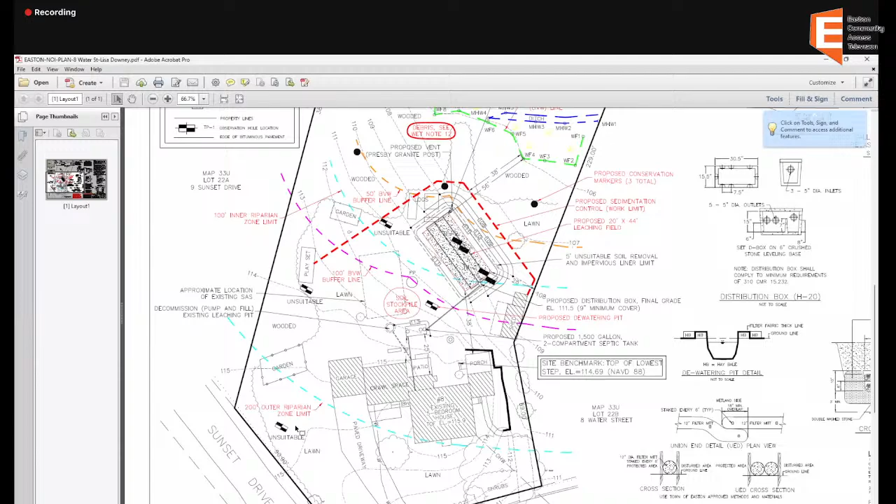Basically, with this one, we're trying to balance the system between the house and the wetlands, so we do end up inside of the buffer zones. We found unsuitable soils in the middle of the yard, which potentially could have put us outside jurisdiction. We started on the side yard, did not have favorable soil conditions, and we did as we got into the back, so that's why we ended up back here.

Basically, we're proposing the removal and decommissioning of the existing leaching pit in the backyard and leaching area, indicated by the rectangles. We're proposing a new gravity system with a 1,500 gallon septic tank to a 20 by 44 foot leaching field. We've provided sedimentation control around the project, shown as the red line, a 12-inch diameter filter mitt. We have our details for that on the plan.

Additionally, we show a dewatering location outside of the 100-foot buffer to the wetland, and a soil stockpile area adjacent to that. Site access for this project will be coming in off of the Sunset Drive side of the driveway, wrapping around the left of the house and going out back. So the sedimentation control line should protect the existing resources as it's shown.

What else? We have some notes of debris to be removed in the backyard. We're also proposing 3 conservation markers to be installed at the time of construction. Those are along the existing tree line on the right and the middle, and the second one's placed into the wood line at the 50-foot buffer.

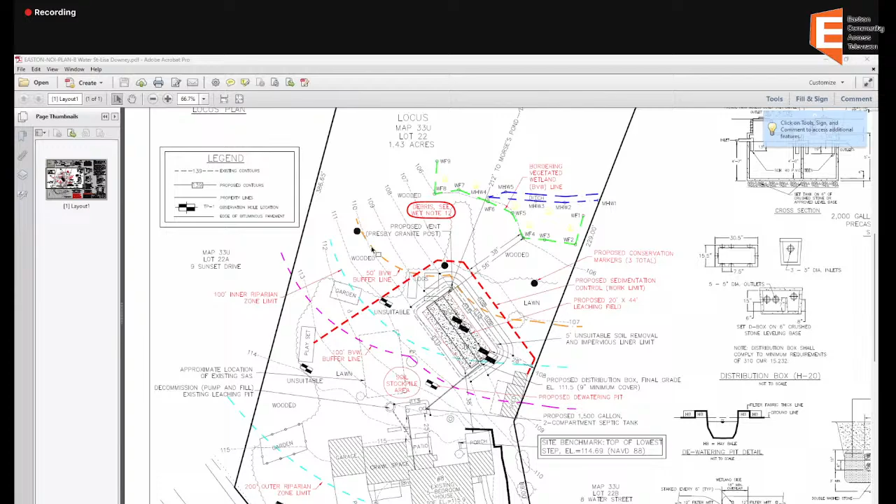Sounds good, thank you. Comments from members of the commission? None for me. Comments from members of the public? Seeing none, Peter, I assume you guys want to close this?

Yes, please. All right, motion to issue an order of conditions and permit for work for 8 Water Street. Second. Just close the hearing first. Should close the hearing first. You're absolutely right. Motion to close the public hearing for 8 Water Street.

Second. Roll call vote. Benson, aye. Carol, aye. Crossman, aye. Speedy, aye. And now we'll go back to my last motion. Motion to issue an order of conditions and permit for work for 8 Water Street. Crossman, second. Roll call vote. Benson, aye. Carol, aye. Crossman, aye. Speedy, aye.

Very good, thank you. All right, and if I could quickly ask, do I get to stick around for the COCs later? I believe at least one of those was continued. I lost the agenda, sorry, I'm flipping through it right now. I think Foundry Street was on there and 520 Foundry maybe. Yeah, and 105 Washington. Is that it? Yeah, I think so.

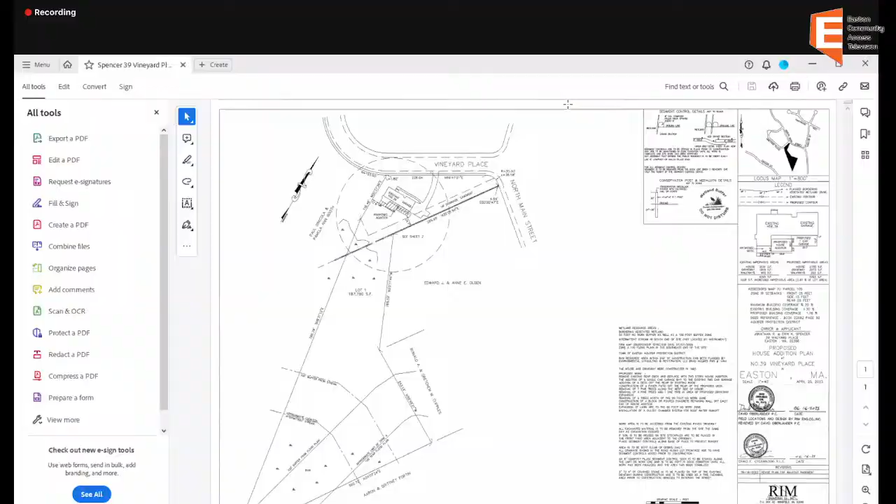Brad Holmes of Environmental Consulting and Restoration flagged the BVW that's adjacent to the rear property line. Let me try to pull up the second plan, I'll have to open that one. I have it too, Craig, if you need me to share, I certainly can. Okay, I think it's here now. You see that now? Yes, that's it. Okay, so, excuse me.

So the purpose of the project is twofold. One is to add on to the existing house. You have the 2-car garage with the driveway coming in off Vineyard Place. You have the existing house with a small bump out in the back, and a deck sitting right there where we're showing a proposed addition, with the walkout basement underneath that deck. So the intention is to add a third bay to the garage in this corner, take off the deck and make this area a living space in the house, 2 stories tall.

And then over here on the second floor - first floor from the front yard, but from the backyard raised up - is an existing window that would be converted into a door leading off to a deck. And then off the deck, we're coming down onto a proposed patio, a paver patio in this area. So if I can zoom in.

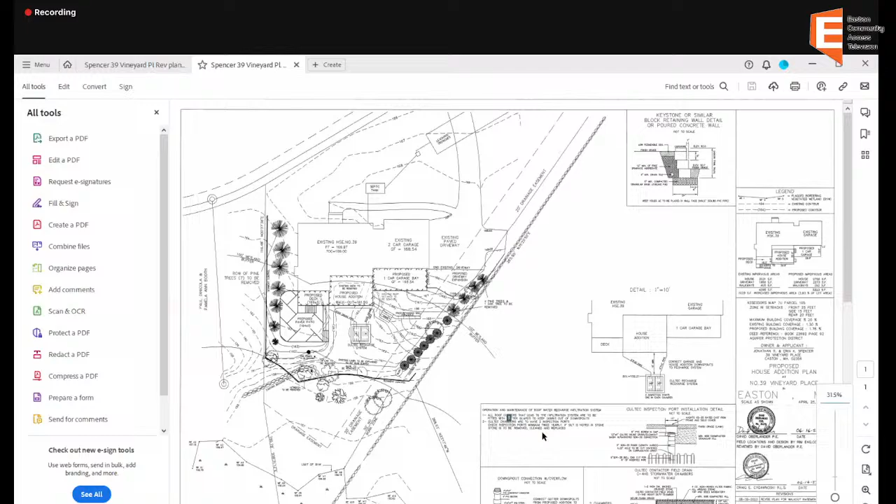The other purpose of the plan is to create more usable area in the backyard. Presently this area has a driveway that comes off and attaches to the garage, but it's up at elevation 168, where the walkout is at 161. So we have a 7-foot drop coming across. It's sort of usable on top, but you come out of your basement and you have this slope that comes around with an existing stone wall underneath the deck at walkout level, and on this side, another stone wall.

So this small area we're showing, this proposed cul-de-sac, is basically the usable area. There's an existing boulder wall they used when constructing the house to hold up this area of the yard. On the neighboring property there's an existing drainage easement - that boulder wall and the soil they retain is part of the drainage design, I assume. Then on the easterly property line we have a stone wall, but running parallel to the property line is a 20-foot drainage easement. At first we didn't think this was active, but there is an 8-inch SDR 35 pipe that comes in from the corner of North Main Street. I don't believe any water ever goes through there, but it is part of the drainage system for Vineyard Place.

Unfortunately, the town doesn't have any record of what was done at the time of construction of the easement, but that pipe is sitting there.

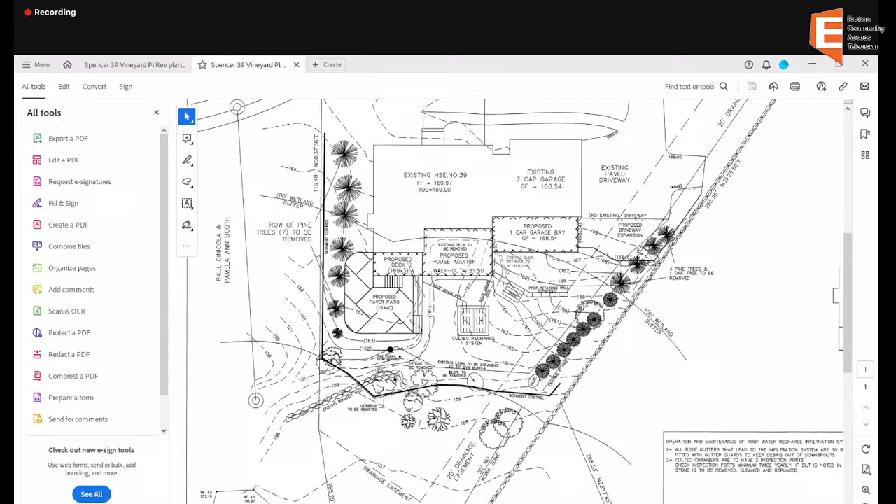I'll move that. Any comments from members of the public? All right, seeing none — motion to close the public hearing for 39 Vineyard Place.

Second. Roll call vote: Benson, aye. Carol, aye. Crossman, aye. Spadey, aye. Motion to issue a negative determination of applicability for the request for determination of applicability at 39 Vineyard Place, noting a +6 under the bylaw, -3 under the bylaw — I'm sorry, +6 under the Wetland Protection Act, -3 under the Wetland Protection Act, positive, and a -3 under the bylaw.

I can do my best to repeat that if that's helpful. Crossman, second, thank you very much. Roll call vote: Benson, aye. Carol, aye. Crossman, aye. Spadey, aye.

Hey, thank you very much, good. Jennifer, should I revise the plan to remove the note about topping the trees? Is that what we decided? You could do that, yes. Okay, well, thank you, thank you. Thanks, you all very much. Thank you.

Calling the next order of business of the Conservation Commission, 102 Eastman Street — notice of intent for improvements to a liquefied natural gas storage facility.

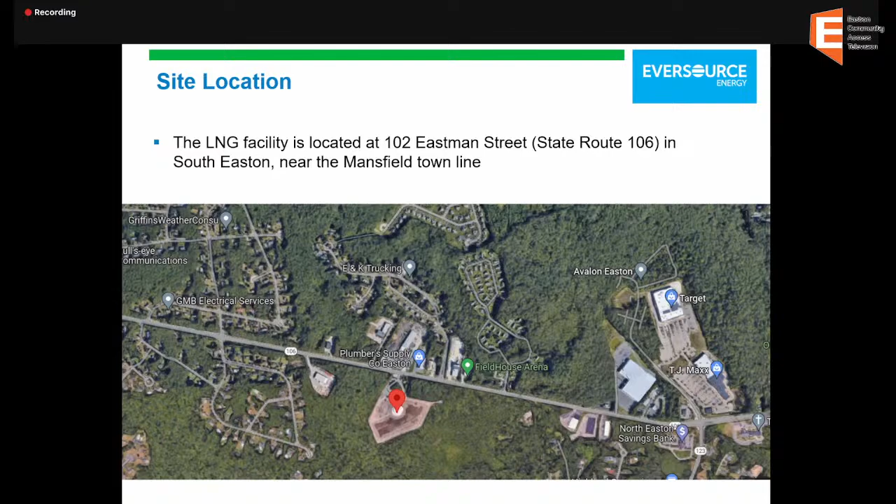So just a little bit of introduction. The plant is located at 102 Eastman Street, in South Easton, right on Route 106 near the Mansfield town line, just down the road from Target, TJ Maxx, and the Route 123 intersection. As you can see in this aerial, the facility is just to the south side of the road where the dot is.

A little bit of an overview of the existing facility: it's a liquefied natural gas storage, which is compressed gas, kept at a very cold temperature for storage. Trucks come in, fill the tank, and it goes into the distribution system for the town. At the moment, the entrance is that paved area across from the Budget rental across the street.

We have that paved area there. The trucks come in. There's a control house in the trees, back behind the trees in the center of the cul-de-sac. And then the rest of the facility is a concrete containment, which also acts a little bit as a stormwater area, which we'll talk about further down. So that's what's there today.

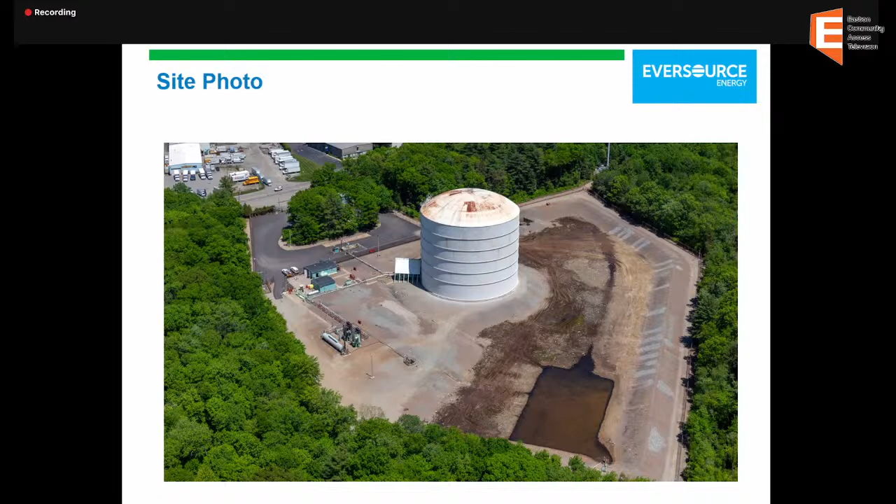The equipment's somewhat outdated, and the facility's been around for a while, so Eversource is looking to put some money into improving this, making the facility more modern and reliable to keep a constant supply to the community. To do that, they are proposing a few new buildings to be built on site, as well as support facilities.

I'm going to divide this into two portions. The eastern portion will be the control building with the septic, maintenance building, the driveway, parking lot, and bioretention basin. On the western side of the property, where we have our resource areas, we have a transformer and generator pad, as well as an electrical building going in. There's the existing LNG tank there on the south, just for reference.

So a little bit of background: the control building will have the controls for the facility, a new modern control room, meeting rooms, offices, and restrooms, which is why they're requesting a new septic system. The maintenance building is for parts and working on the facility. And then a 37-space parking lot to support staff for these buildings, along with the bioretention basin.

I'll go into each of these more in depth, but for the stormwater system on that side - on the western portion, the electrical building controls the electricals for the facility. It needs to be somewhat near the tank, but also at a distance, to keep it in proximity to what it's controlling while keeping a safety distance from the natural gas. Then the transformer and generator provide backup power and power to the facility. This is that existing cul-de-sac under the control building label, for reference.

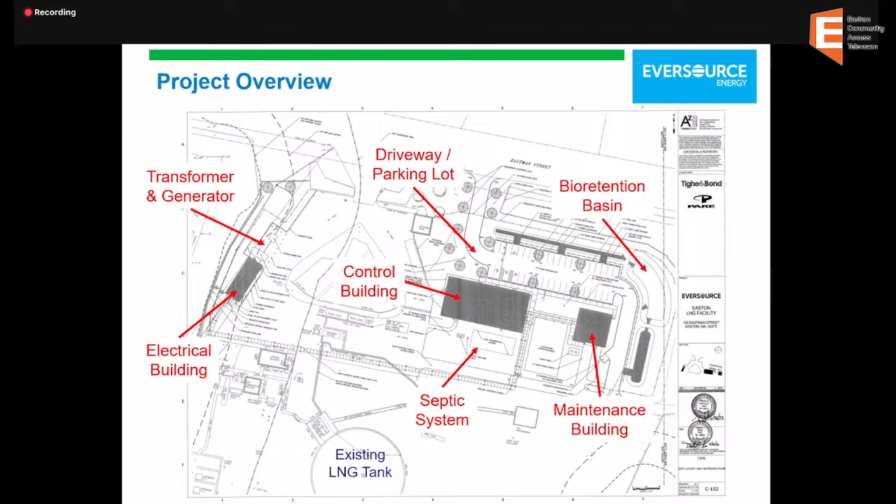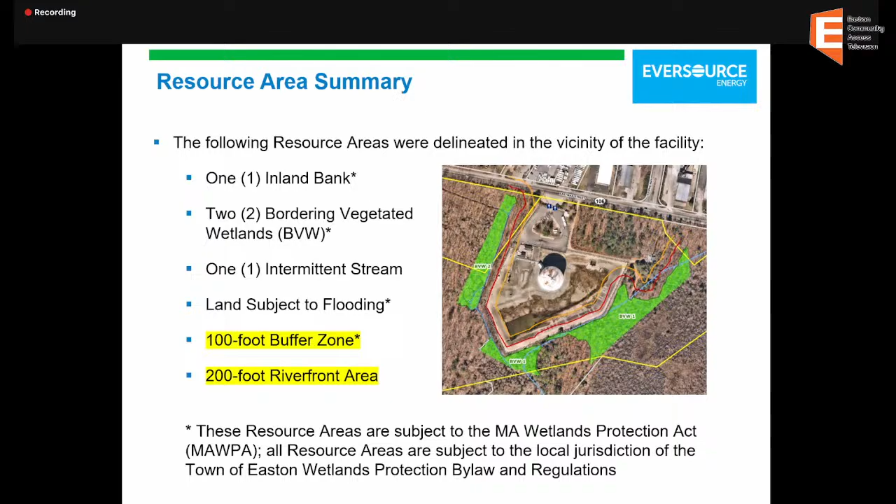Only the 100 foot buffer zone is subject to the Wetland Protection Act. The rest are under the Easton local bylaws. So these are going to be our proposed impacts as part of this.

We're looking at about 10,150 square feet of resource area alteration. Again, nothing within the first 50 feet. We are looking at a majority of the work within the 50 to 100 foot range of the buffer zone, again partially already developed. And then 1,050 feet within the rest of the riverfront area from the 100 foot to the 200 foot zone. There is more work beyond this, but it's an already developed area that's already pavement, already impervious surface as it is.

So only the work in the 100 foot buffer zone is subject to the Wetlands Protection Act, and the type 1 intermittent stream under the local bylaw gets that 200-foot riverfront area. It's a type 1 under the local bylaw as a headwater stream going into forested wetlands. It doesn't fall under the Wetland Protection Act because it had a very small drainage area and stream stats, and it's mapped as an intermittent stream on the USGS.

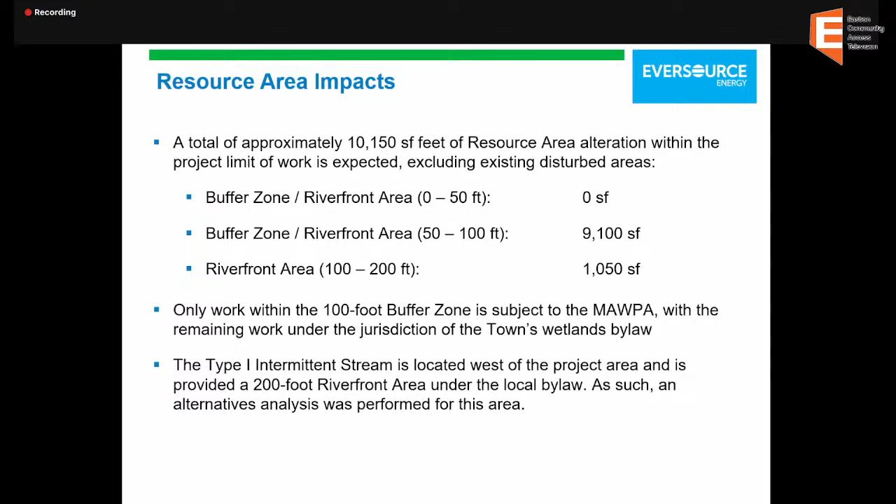This work is going to require a couple of waiver requests. One being the riverfront area—a lot of it is already developed, so we're already within the performance standard setbacks that exist here. We minimized as much as we could in this area in the design to not impact it as much as possible. And then the electrical building—we're putting it there because it needs to be in proximity to the equipment it serves, but it also needs to have a safety setback. Other areas within the facility this wasn't feasible.

If you put the electrical equipment too close, it needs high classifications and safety standards, and there are parts that aren't even made—they may be impossible to get in that type of electrical classification. In some other areas, there are future safety measures proposed, such as a fire water building, which would provide additional water for pumping in case of a fire. We don't want to put the electrical building there at the moment because then there wouldn't be a spot for that safety building in the future. It's also somewhat far from the equipment, and would be putting it further away from the equipment it serves.

We're also looking for a waiver for the ACEC. We are within the Canoe River Aquifer. To address aquifer water quality concerns, we have the new stormwater management system that would go in with this. With where we are paving, we're going to decrease the rate of water going into the buffer zone that currently runs across the parking lots and into the buffer zone. So we'll have less water shooting into the buffer zone at a more natural rate, and it will also be of better quality because it's not picking up sediment and contaminants off the pavement or off Eastman Street that normally flow into the facility.

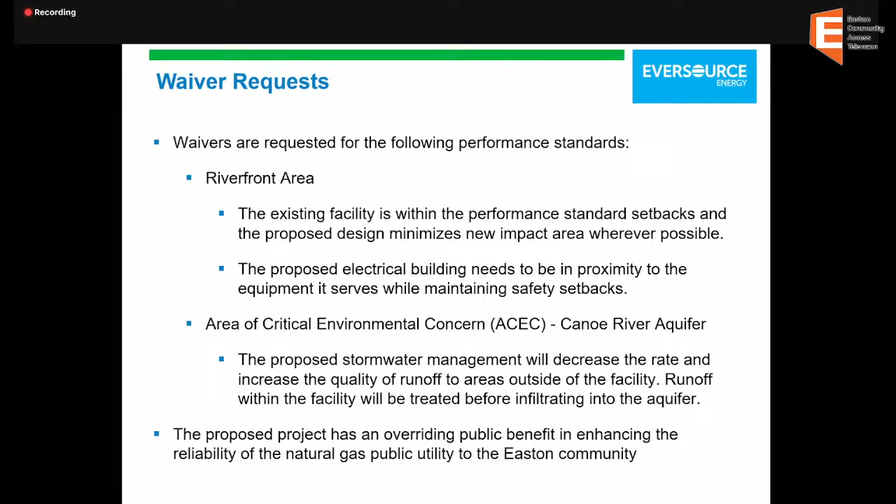So just to go into some specifics with the stormwater and resource area impacts, I'll start on the eastern side with the new buildings. We'll have the new control room building and the new maintenance building. They'll require a septic system to be built to the south of the control room building.

Those permits are being filed separately with the other parts of town government. To the north and east of the parking lot, we're going to have two sediment forebays and one bioretention basin. The runoff being collected will settle sediment in the forebays, and then the water will infiltrate in the bioretention basin cleaner.

Of note, the new buildings will also have roof drains that go straight to the bioretention basin, keeping that water coming right from the roofs. It doesn't collect anything running off across the parking lots, across the stone, the lawn, and all that. It keeps that water clean, directly into the bioretention basin — a nice low impact design.

All the work on this side is outside of wetland resource areas. We don't have any wetlands located within 100 feet here, no streams within 200 feet. So this whole area is mostly about the stormwater design and the septic concerns.

On the western side of the site, we're talking about the new electrical building being built here, plus the transformer and natural gas concrete pads, and the generator and transformer that go on those pads. To accommodate these, we'll have to remove an area currently wooded.

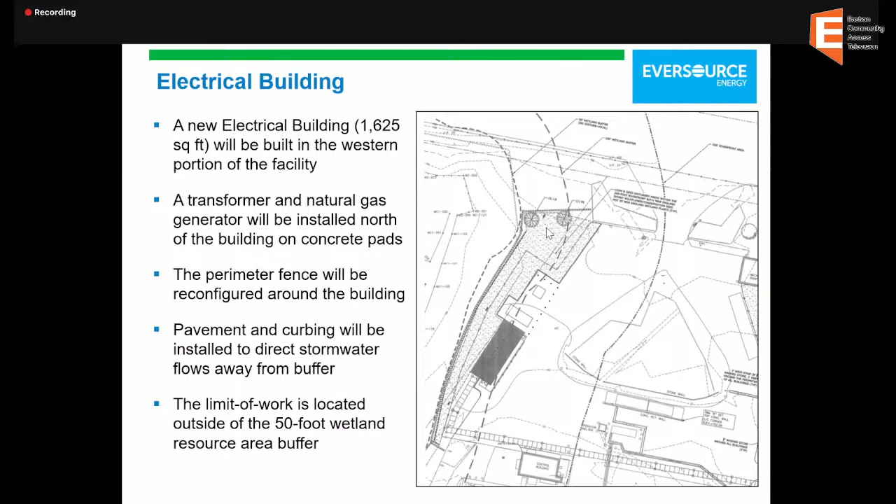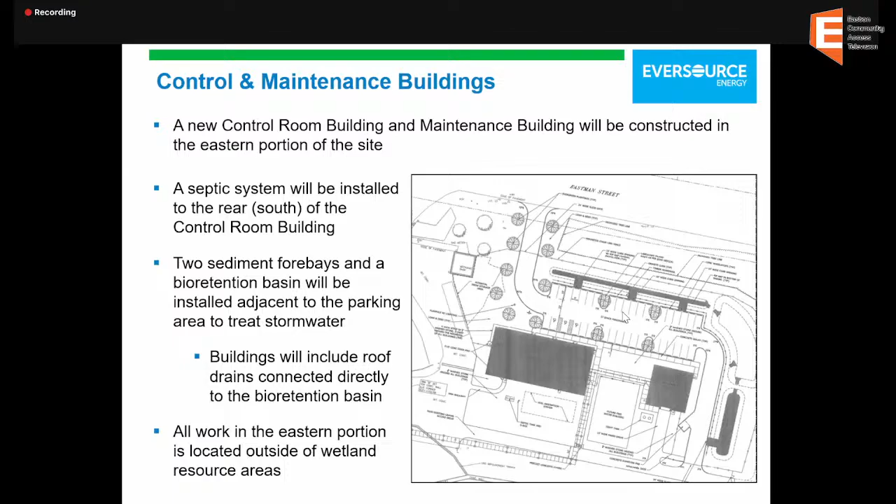I should also note on the last slide that this area around the bioretention basin and around the driveway will be a conservation seed mix, as well as a conservation seed mix within the bioretention basin, and some trees planted, mostly native trees. There are a couple ornamentals in there for looks, for noise barriers and privacy as they grow.

A little side product of this as well: there's an existing access road where the driveway comes in, and that goes to a cell phone tower next to the facility. For security concerns, that road will have to be routed around the new fence. So there's going to be a new curb cut a couple hundred feet to the east with a gate, a new access road to the tower tying into the existing one. The existing road here will become part of the parking lot.

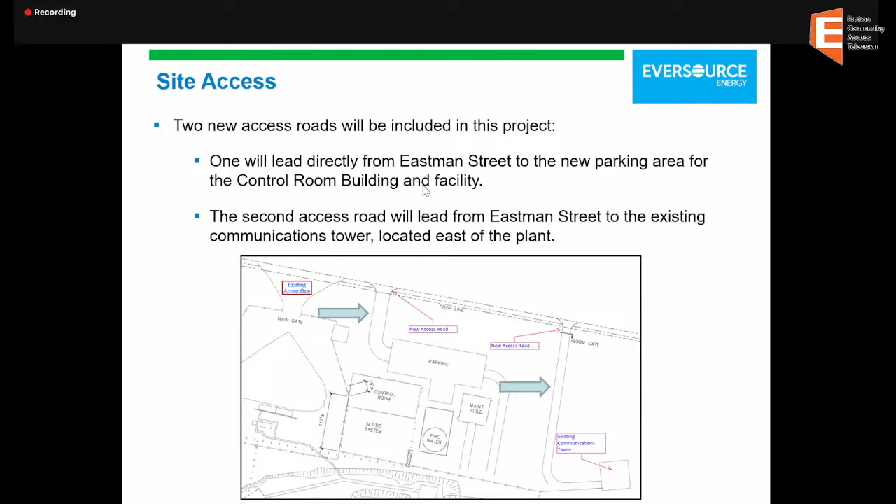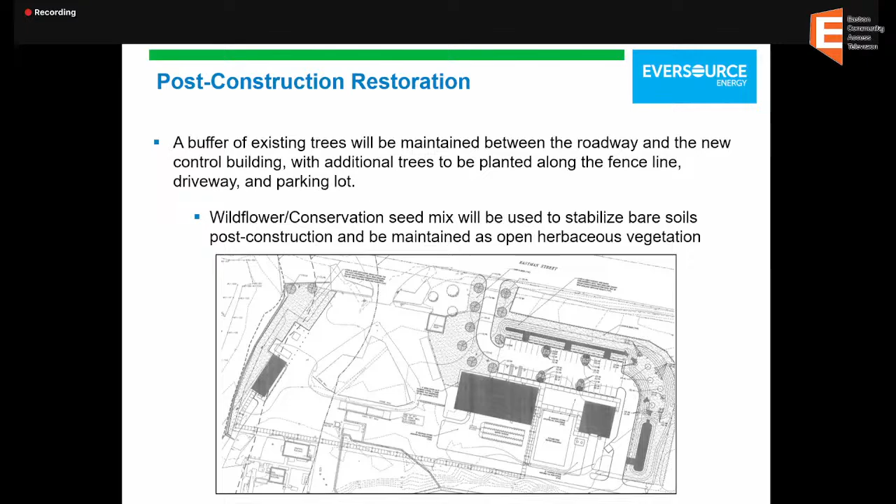So just to summarize, we're modernizing the LNG facility to ensure continued reliability of the natural gas utilities to the community. We're maintaining that 50-foot no-disturb buffer at the moment, and limiting the new alteration to the least extent we possibly can. The proposed work's only going to occur within the buffer zone and riverfront area, which is already partially developed as the existing facility. Stormwater management systems are going to treat more of the runoff at the site, reducing the rate and increasing the quality of the water to the buffers.

So we're not impacting any wetlands directly. We're not expecting to impair any of the habitat functions or the water quality of the ACEC. We still have that very large wetland and forested area around the site that's going to keep both privacy and habitat and ecological function relatively intact for the whole area.

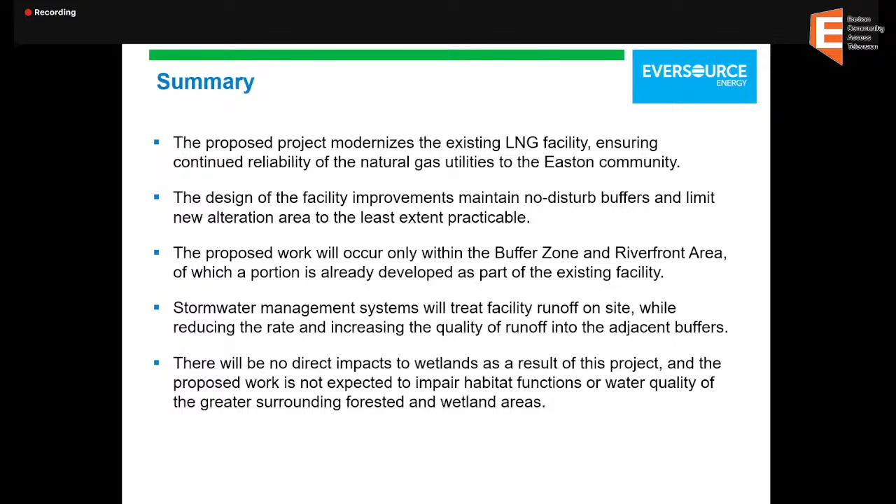And with that, I'll take any questions. We have a few other folks here from Eversource, as well as folks from my company who are on the stormwater side and septic side. If you have any questions specific to that, I can field any wetland resource and permitting questions.

That was a lot. Yes. Great job keeping it succinct.

I think, would you mind pulling up the slide that just shows the overall plan? Yep, actually I have it, there we go, one right there separate. Perfect. How old is the existing facility?

That's a question for... it's okay, that's kind of just my own personal curiosity. I've lived here my whole life, and I don't think I knew that this place existed, which may be by design.

Are we adding staff to the site? It looks like the way it says doesn't seem like there's manned buildings, and now we're adding them. Could you speak to that a little bit?

I actually want to jump in. I'm Jennifer Pataro with Eversource. There's a few people on right now who would be best to answer some of these questions. If you could promote them, James Blackburn. Absolutely. Also Cheryl Kosgarten and Tim Graves. Thanks, just so we can best answer your questions.

Good evening. Hi, good evening. My name is Jim Blackburn. I'm the manager of LNG Engineering and Technical Services, so I thought I could step in and try to address some of the questions.

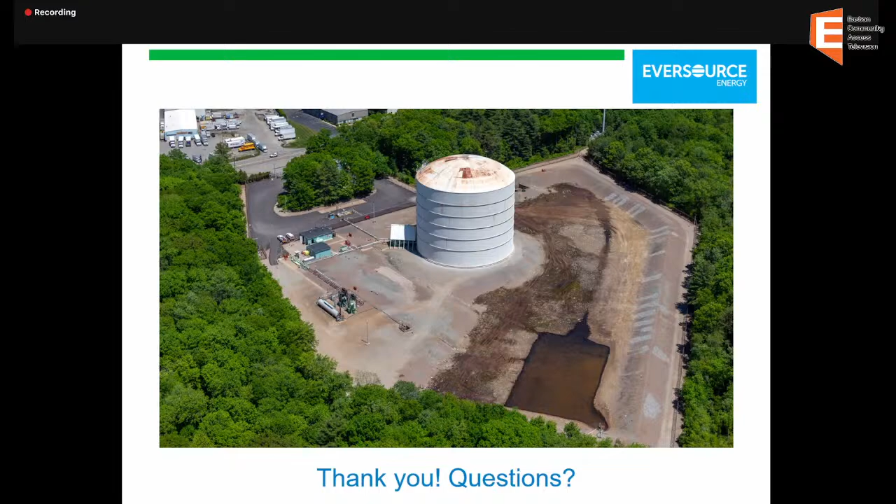Now I'm going to ask a question that I'm sure you guys get asked all the time, and it's going to reveal my ignorance of how natural gas works. Procedures and protocols in the event that there were to be a leak, would it have any chance of impacting the wetland resource areas? And what happens?

So LNG is fairly unique. Folks don't recognize... I grew up right next to a facility, our Acushnet facility, didn't know it existed. We have two others, my boss and another superintendent in the group both live right up the street from this facility, didn't necessarily recognize that it was there until we purchased the company.

LNG is basically natural gas that's been cooled down to negative 263 degrees Fahrenheit, at which point it turns into a liquid. Within that storage tank, it's stored at atmospheric pressure. It's not compressed, it's basically at 0 pounds pressure. That tank is one big thermos, and we just keep it inside there at that negative 260 degrees Fahrenheit. If LNG was to spill, it's

non-toxic, non-corrosive, and due to the temperatures, it'll basically begin to vaporize until it's all vaporized, which would take a significant period of time. But over time, the heat from the ground and the air and the atmosphere would warm that LNG up, and it would vaporize and dissipate into the atmosphere.

As far as a groundwater containment or impact in the wetlands, we would not expect that, certainly with the containment at the site. That would be all fully contained within the storage containment or within the spill containment, and then over a period of time it would evaporate into the air. Now certainly that's an emissions concern, but as far as groundwater, we don't have that concern.

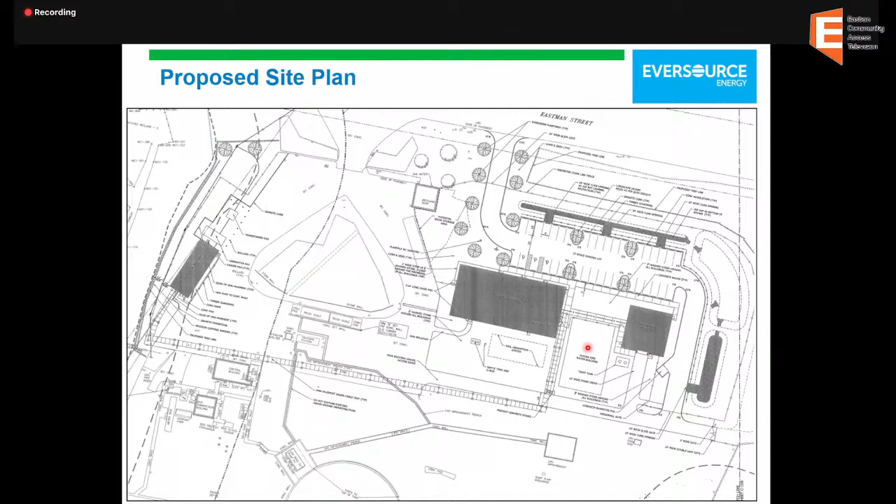Any members of the public, anyone else on the commission have a comment or question? Any comments from members of the public? Seeing none. Jennifer, we got to continue this.

Our next meetings are July 24th and August 7th. You're just about to start your stormwater review, though. Any idea when you'd like to come back? I guess that depends on when the peer review will be done, correct? As soon as possible?

Have you mailed him your permit, your application yet? We did. We actually sent that out this morning, so he should receive it in another day or so. Okay, so it seems, and we still have to receive payment. I mean, one month seems reasonable to get the review and the comments back, and it's certainly in time for you to review them as well.

So the payment for the peer review, does that go through the filing system as well? It'll go through that, yes. Okay, thank you. All right, so unless you guys want another date, I'm gonna continue this to August 7th. A motion to continue to August 7th. Does that work? Okay. Sounds good.

So, motion to continue. I lost the address. 102 Eastman Street to August 7th. Spady, a second. Roll call vote. Benson, aye. Carol, aye. Crossman, aye.

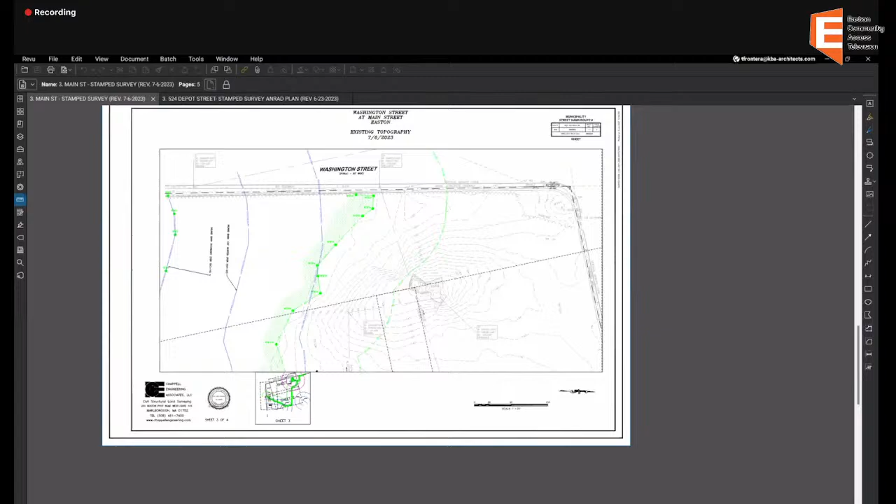Thank you, and Tom will share the screen. I'll introduce the team. Greg Join with Kaestle Boos Associates. We are the architects for the town on the public safety and Department of Public Works municipal project. With us tonight is Leah, from our wetland scientist, who will run through the plans for Washington Street. This parcel is a portion of the Stonehill property, and the town is in talks with Stonehill for a lease of this property to develop as a municipal facility.

I'll turn it over to you, Leah. Yeah, sure. Hi, Leah Basbanes, Wetlands Consulting, and I did do the wetlands delineation on the property. If you could show the plan that has all of the resource areas on it at once rather than section by section.

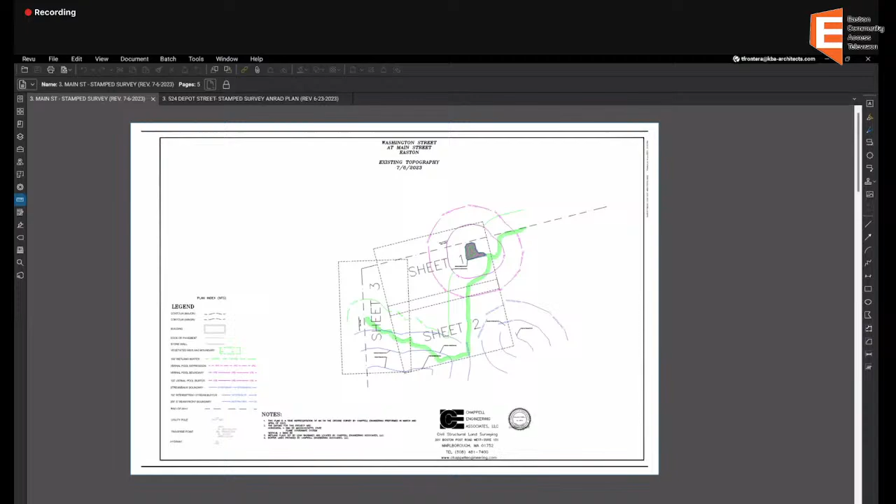That good, Leah? Yeah, that one's better. If you could, zoom it in just a wee bit more.

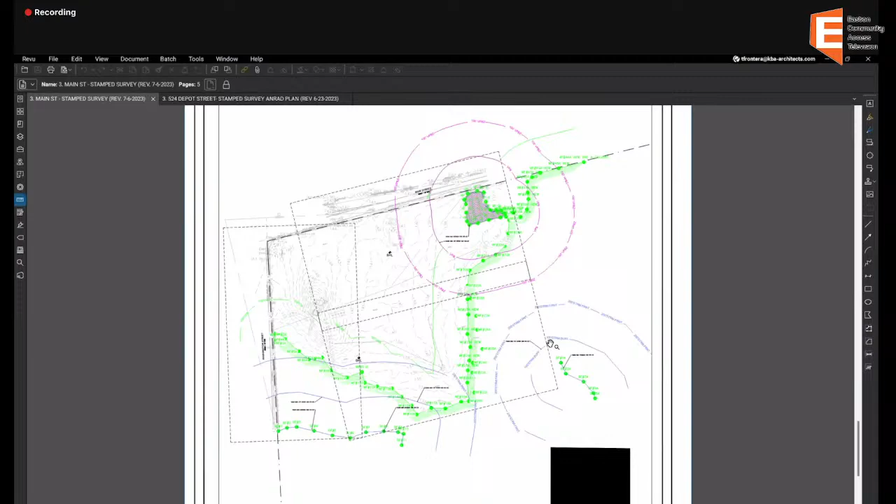Okay, so that's good. Essentially, what I flagged on the property is vegetated wetlands per your bylaw, stream bank, and vernal pool. In the area of the vernal pool, we actually have three overlapping resource areas: the vernal pool, the bank of the vernal pool, and the whole area is a freshwater wetland as well. So one line is depicting three resource areas under your local bylaw.

I don't know if this has been hand dug or not, but it's suspiciously different than the rest of the wetland throughout the rest of the property. The bank is quite abrupt, and then it just channels into the A series wetland area there.

Definitely vernal pool. There were several species of amphibians in there in various stages of development. Some smaller ones had no legs or tails, some had definitive legs and tails. There was a snapping turtle in there having quite a good time with all those poor little critters. Several aquatic insects, caddisfly larvae, water striders, water boatmen, predaceous diving beetles, etc. So there's no doubt that that area actually is a wetland - I mean, a vernal pool.

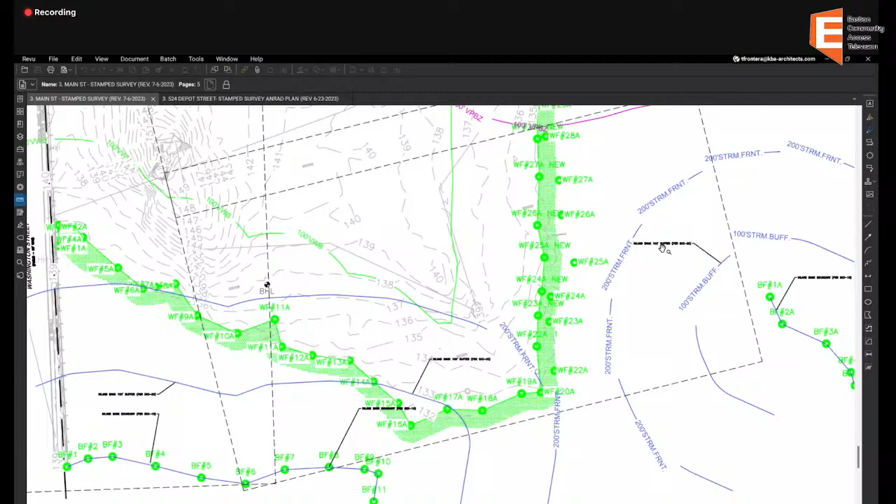As you can see in the plan, we have the 100-foot buffer zone to the bank, the 100-foot buffer zone to the wetland, and the 200-foot riverfront to all of the streams as well as to the vernal pool. The site is not within floodplain, not within the ACEC, and does not have a status for priority habitat. So we have the buffer zones and riverfront for those added protections for the resource areas.

Again, methodology for defining the vegetative wetland was based on your bylaw of a dominance of wetland indicator species. Soils - just old habits die hard - I did observe soils out there, and it actually fell fairly close in line. If you were to do a soil and vegetation delineation, I'd say the vegetation line was pretty similar to that as well. But what is depicted here is the vegetative line.

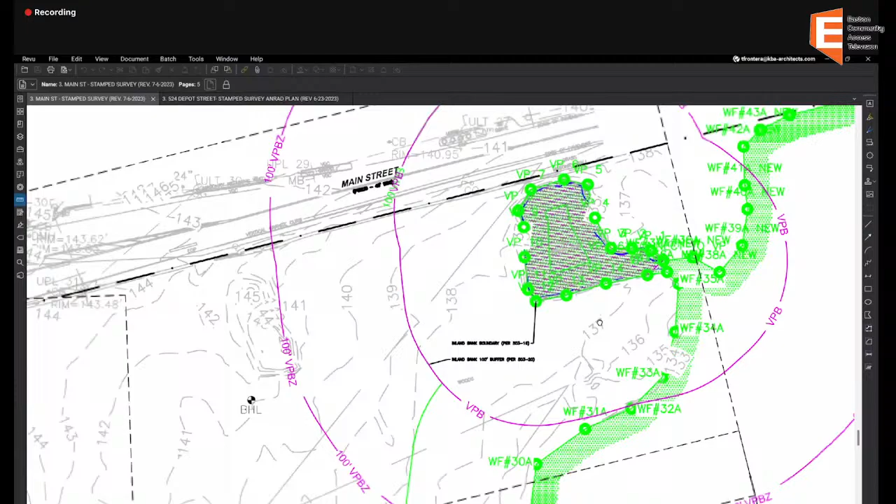The banks were defined as the first observable breaks in slope, including any little undercuts or sandbars or whatnot. The vernal pool confines were essentially the limit of water, which happened to be at bankful stage within that confined pool - which is essentially what's making the vernal pool, the bank, and the wetland all be the same delineation.

That's essentially it. Do you have any questions?

Sorry, I was on mute. So my question here is, can I just get a good definition of the boundaries that we're doing an ANRAD for? I just want to be as precise about that as we can be.

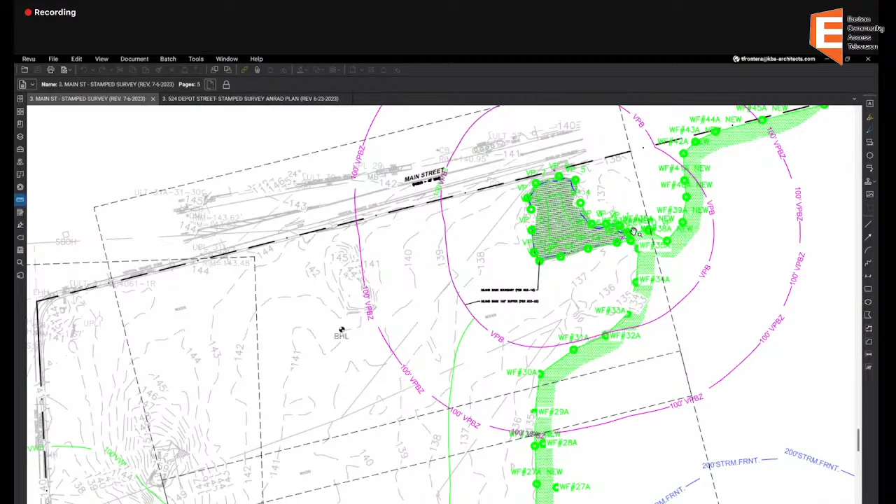So the boundaries would be, based off the delineation, flag 1A through flag 46A. And then the vernal pool delineation, vernal pool 1 through 16, and bank 1 through 16. And then the two bank boundaries, bank 1 through 11, and then bank 1A through 5A. But do we have a definition for the site itself?

Because typically when we do an ANRAD, we're doing it on the entire parcel. I know it sounds like this is something the town's in negotiations for. We're trying to confirm a wetland bound, and I just want to make sure we have a clearly defined boundary of what we've delineated, as opposed to the rest of this parcel.

The whole parcel is Stonehill College. We're just looking at this little portion up here. It's approximately 5 acres, accommodating the northwest corner of Stonehill's parcel, bordered by Main Street and Washington Street. The bounds and flagging we've shown go a bit beyond where the parcel will actually be, where the development area and survey boundaries will be. It's an approximate 5 acre development area, starting at the two streets as the bound and going inward into the site.

Thank you very much, that's very helpful.

Jennifer, comments? Leah answered my question about the BF1A series stream, so that was helpful, and nicely done again, Leah. The boundary looked really good to me, I don't have any questions on the flags. And Ben, we don't normally list the flag numbers, but without a property line, we can do that this time.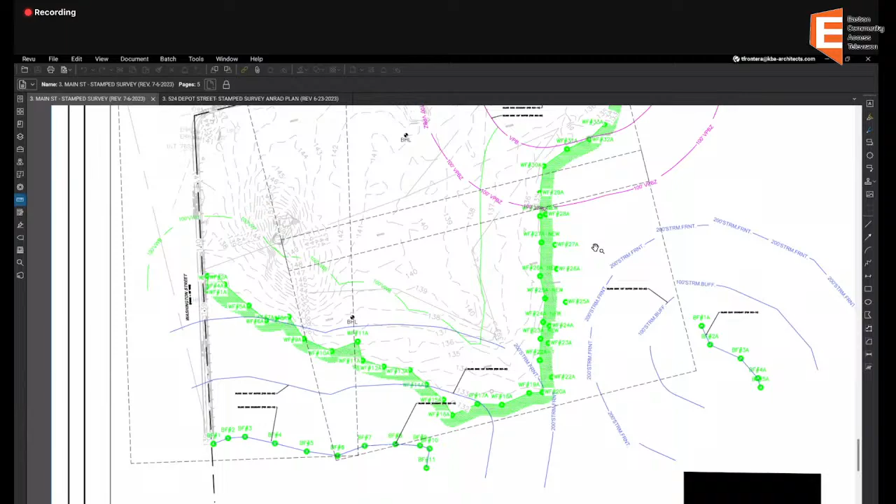Okay, I may need a little bit of help with that motion, Jennifer. Yeah, you can, we can just make a general statement: here are the boundaries as shown on the plan, and I'll write it up for you. Thank you very much.

That stream's interesting. Any comments from members of the commission? It's great, good. Any public comment on this project? Seeing none, I assume you guys would like to close the public hearing on the ANRAD.

Motion to issue an ANRAD for 327 Main Street, and Jennifer will demarcate the flag numbers. Benson, second. Roll call vote: Benson, aye. Carol, aye. Crossman, aye. Spady, aye. Very good.

Thank you. So our next order of business, I think all of you are sticking around for 524 Depot Street, another ANRAD. This was the ANRAD presented at the last commission meeting. I think there's been a revision issued before that meeting that Jennifer was going to verify.

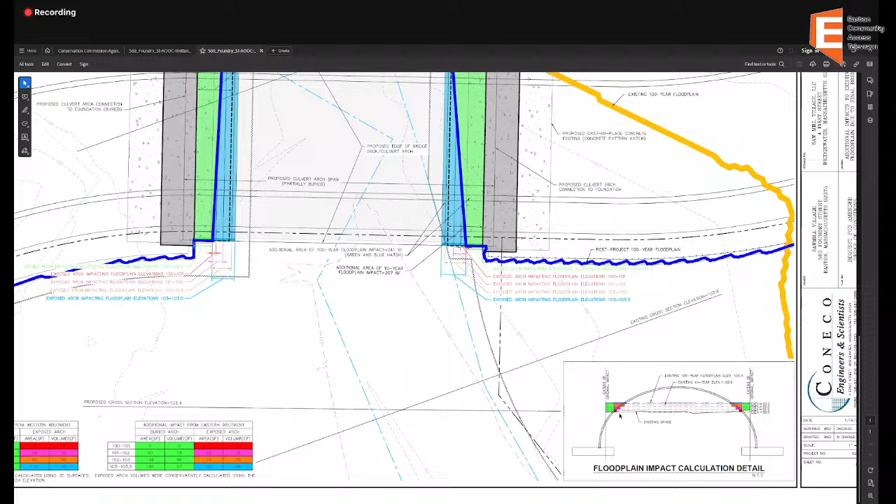So when we did all the calculations for this, we found we already had enough floodplain storage for the majority of the additional impact. Where we actually needed additional storage was in the 101 to 102 range.

Because we can't really do storage at only one elevation, we ended up extending the bottommost contour, which is where the wetland replication was as well. So in turn, we also added additional wetland replication to the area.

Zooming in here, the 100 contour went from this dashed black line to the solid black line. The edge of the original replication area went from this dashed green line to this solid green line. The 10-year floodplain went from the dashed pink line to the solid pink line, and the edge of the 100-year floodplain went from the dashed blue line to the solid blue line.

For the numbers here, you can see this was the original compensation we were required to meet, this was the additional from the new bridge impacts, and this is the total. This is just the comparison of what we are provided within this replication area as a total - the previous plus the new additional compensation.

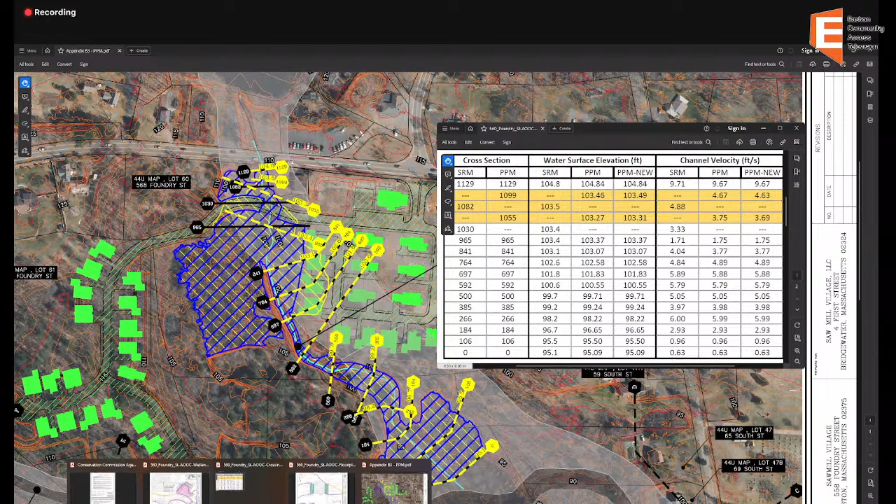I went through that pretty quick, so I'm happy to take questions. I think I generally covered everything. We did do some of these calculations within AutoCAD, but we kept all the areas on these pages so it's easy to work back if anyone wants to check it, or if we have a peer reviewer check it. It should be available from the numbers on this page.

We also responded to some of the commission's questions from the last meeting. One was the lifespan of this structure compared to the concrete structure we originally proposed. At the past hearing, we mentioned there would generally be a 25 to 70 year lifespan for this new structure. We went back and referenced the longevity calculator from the NCSPA and found that under this particular condition, the bridge would have more of a lifespan of 100 years.

We ran that calculator based on two different pH levels, and provided the documentation from that calculated lifespan in the package. A concrete structure generally has like a 75 to 100 year lifespan according to the CONSPAN specifications. We also wanted to note that we are not using sodium chloride, so that'll help maintain the lifespan of the structure. I just wanted to clarify that.

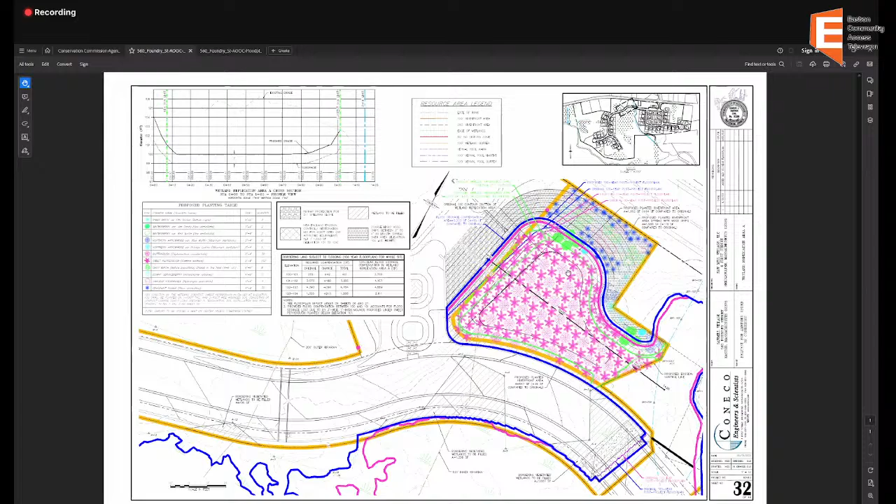We have added plantings to the riverfront area. So the riverfront area planting has expanded, as well as plantings within the wetland replication area, at wetland replication area A.

I believe those were some of the comments and questions the commission had last time. I think we've responded to everything. We did provide an analysis describing any potential additional impacts to resource area functions and values.

From our analysis, there really is no change to the functions and values that could have potentially been impacted under the original design. The additional flood impacts are in the same general location as the existing structure, and the expansion of the floodplain to mitigate for the loss is in the same general location as the original floodplain mitigation. So we couldn't see any real additional impacts to any of the functions and values protected under the local bylaw or the Wetlands Protection Act.

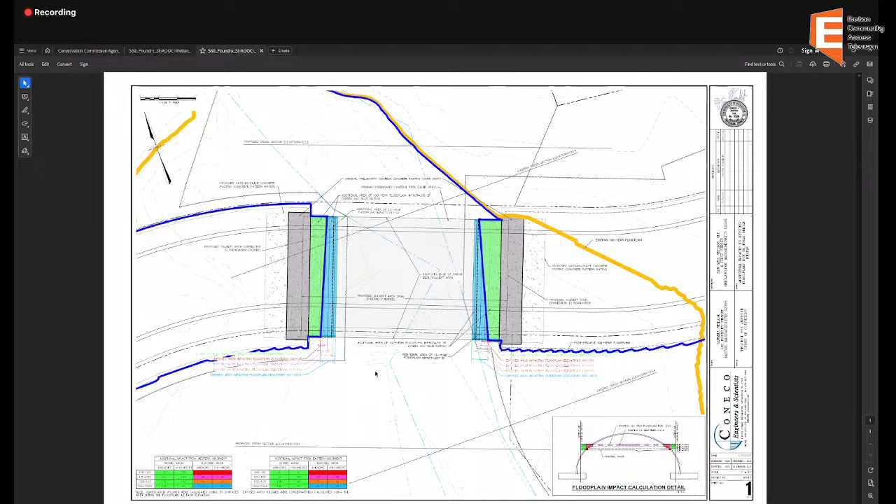So our limits of work are the same as the original concrete structure. So when we expanded the mitigation area, we stayed within the same footprint. I think I explained it incorrectly last time. We expanded the mitigation area and everything. We slid everything to the west.

Correct me if I'm wrong, Megan. Everything got slid to the west, and there was no steepening of slopes or anything. It was just moving everything within the same impact footprint. Essentially, this riprap slope started down here originally, and it kind of just slid up this way, and we slid the full slope this way and the basin that way as well, and kept it within the previous limit of work that we proposed.

Well, I have to say, I wasn't at the last meeting, but I watched it. This was an incredibly thorough response to this commission's questions. Thank you.

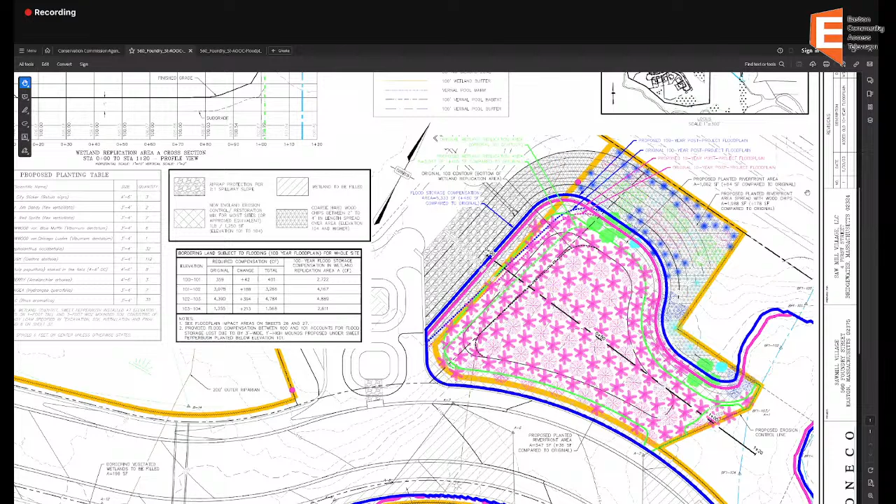Do I have to ask if there are members of the public on an amendment? I guess I will, so what does it hurt? But just a weird point of practice here. Any comments from members of the public regarding the proposed amendment?

I think it was well explained, cleared up a lot of questions I had from the last meeting. Thank you.

Amazing what a bridge engineer can add to a highly technical design issue. I particularly like taking into account pH on longevity. That was a nice touch.

Seeing no public comment here, I'll do a motion to issue the requested amendment for a revision to the bridge at 560 Foundry Street, as a modification without requiring any additional conditions to the order of conditions or permit for work. So moved. Second.

Roll call vote. Benson, aye. Carol, aye. Crossman, aye. Spady, aye.

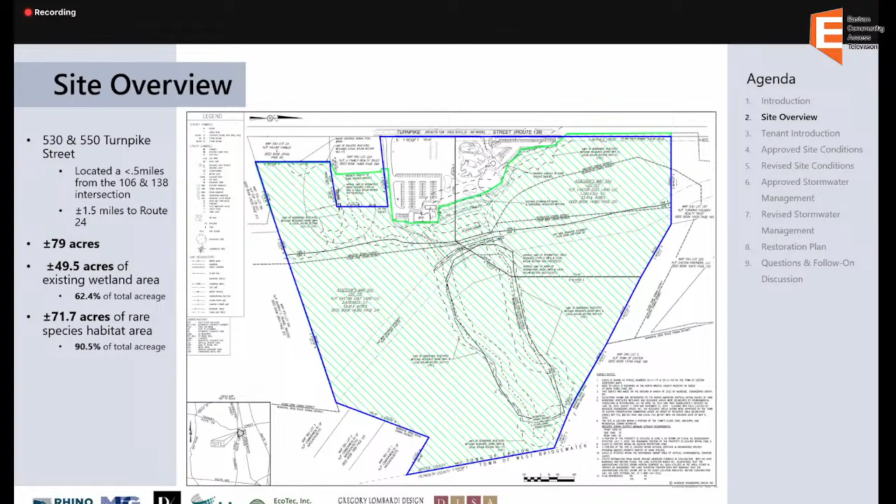So we've been talking with everybody locally long before actually we began the hearings in June. And now John is just going to jump into why we're here and what we're planning to do. Yeah, absolutely. Thank you, Rob.

So what we're here tonight to present to you are a few plan changes that are largely a result of a tenant that we have recently executed a lease with. That tenant is Beacon Roofing Supply, a publicly traded company and the largest distributor of roofing materials in the United States and Canada.

They have over 7,000 employees in over 480 locations in all 50 states and 6 provinces. Rhino actually has a bit of a history with Beacon. This is the third or fourth project we've done, the third ground-up development that we've done with Beacon, so we have a great working relationship with them that we've developed over the years. This facility at 530 Turnpike will replace an existing facility that Beacon operates out of, located just about a mile and a half up the road at 393 Manley Street in West Bridgewater.

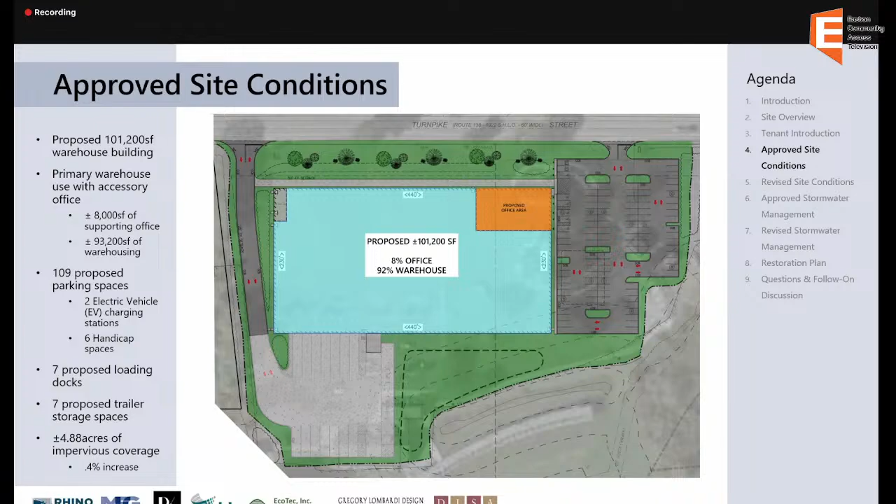So approved site conditions, as Rob mentioned, we were back in front of the Conservation Commission and the Planning Board about almost exactly a year ago with a 101,000 square foot warehouse building, 8,000 square feet of which would be supporting office, 93,000 square feet of warehouse, and associated parking and loading requirements, and obviously stormwater to go along with it. So the change that occurred was, again, largely tenant driven.

So one aspect of Beacon's operation is customers will arrive through the passenger parking, which is the north entry that you see here, or plan east. They will enter the sales office, which occurs in the top right-hand corner of the building, and then proceed to swing around to the back to pick up materials through some of the new drive-in loading dock doors that we have proposed as part of this change.

So due to the operation with customers picking up materials in the facility, it was important that there was a connection between the passenger parking area and the trailer parking and delivery entrance, such that customers didn't have to exit onto Turnpike Street and then drive around to the rear of the facility. So it was an important aspect of their design, and something that we wanted to do our best to accommodate them. So what you see here and what we're proposing is largely to accomplish that.

In an effort to offset some of the impervious increase that we have proposed as part of this plan revision, we've actually reduced the overall size of our parking. So we went from 109 approved parking spaces down to, I believe, 85 parking spaces, which is well within what Beacon's needs are. And that has been reviewed and conditionally approved by the planning board pending the outcome of this hearing.

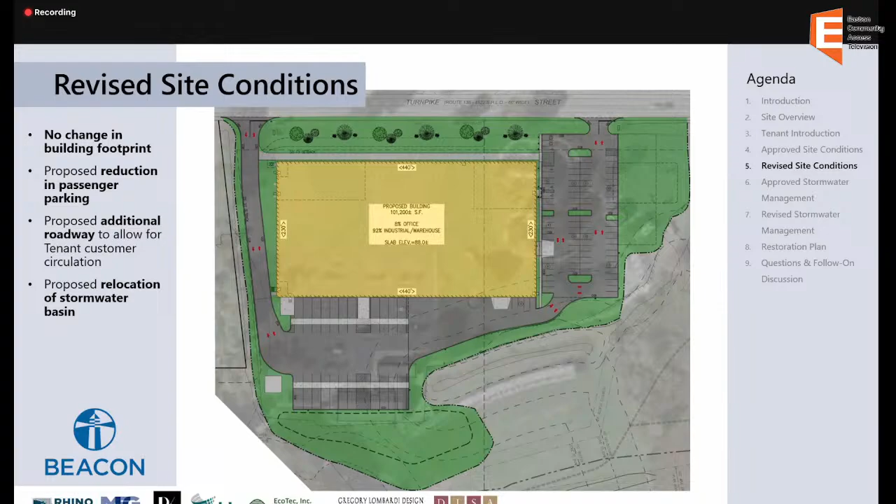As you might notice between the first originally approved plan and this revised plan, the roadway that we've proposed has passed directly through where our previously approved stormwater basin was. So we obviously have had to relocate that, but I will let Austin Chartier from McKenzie Engineering take over the detailed conversation as it relates to that. Thanks, John. Yeah, Austin Chartier, McKenzie Engineering Group.

So on the screen here is the approved stormwater basin location. I just wanted to quickly highlight what changed and what the design parameters here were. Essentially, the main design criteria was providing the 1-inch volume for TSS removal, which is required by the Easton stormwater bylaw, and also to reduce the peak flow rates off the site as well as volumes. So the approved design did that—it provided the 1 inch of volume, and it also reduced peak flow rates and volumes.

The stormwater basin in this location was only providing 2 feet of groundwater separation, which is acceptable per the stormwater handbook, but you do need to provide a mounding analysis, which we had provided. Essentially that showed that there could be a little bit of mounding within the groundwater in the abutting wetland. The immediate wetland adjacent to this basin is essentially a detention basin that was built when the original property was developed, so the actual effects of that mounding are kind of hard to interpret with a man-made embankment and stuff like that.

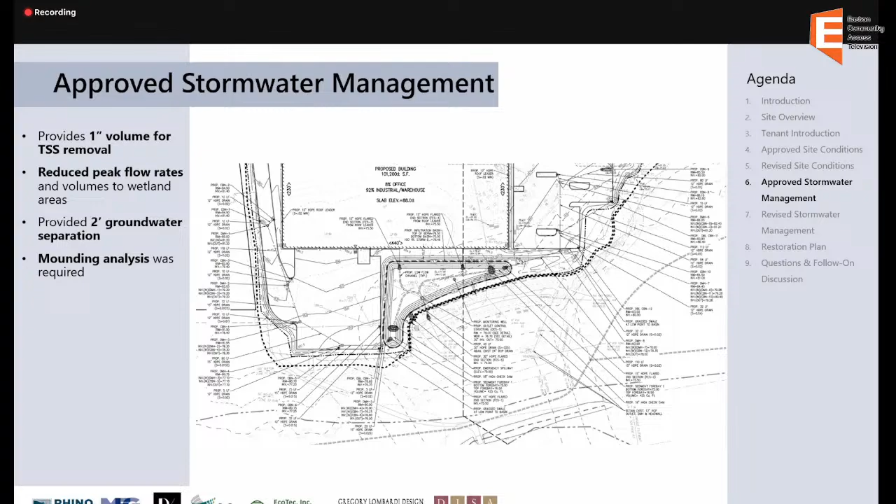So either way, next slide, John. The goal here was essentially to provide the same design parameters: the 1-inch volume for TSS removal, as well as reduce the peak flow rates and volumes to the wetlands. Similar to the approved design, we're going to outlet this basin into that existing detention basin, just on the south side of that basin, or plan south of the existing basin, the north side of the proposed basin. One positive of relocating this is providing the 4 feet of groundwater separation that the stormwater handbook recommends, so it'll get a little more treatment before entering the groundwater.

Overall, we added about 10,000 square feet of impervious to the site. We were able to keep that number low, as John mentioned, by reducing the parking spaces on the planned east side of the entrance. So that additional 10,000 square feet of impervious resulted in about a 5% increase in the size of the basin.

Myself and Rhino and John Chessia of Chessia Consulting were out there in February. We had to dodge a few golf balls out there, but we got the testing done, out there February 22nd. We submitted a revised stormwater report to John Chessia, and we received comments on June 22nd, and we just last week submitted a response to those comments.

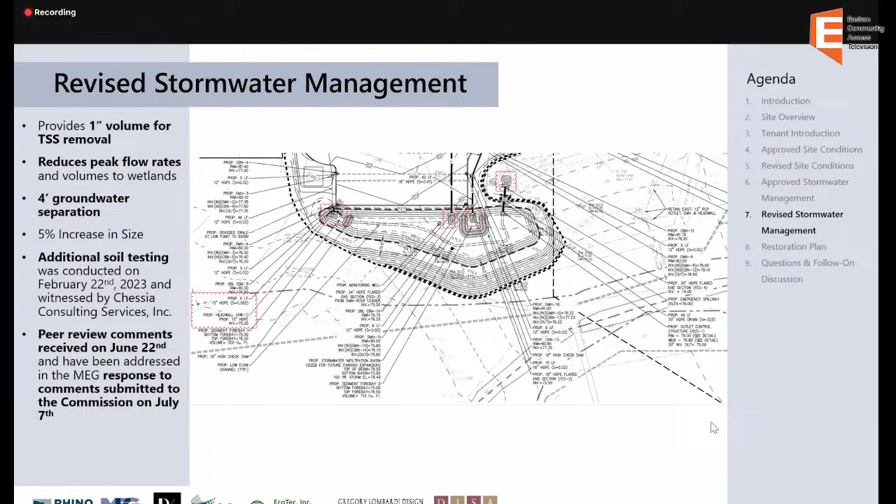We just submitted the big ticket items on the review letter. We plan to submit a full package to the commission and the peer reviewer after we get input from this public hearing. With that, I think I can turn it over to Scott Morrison of EcoTec, who can speak a little bit about the location of the basin and impacts to the resource areas.

Thanks, Austin. Scott, just for the record, Scott Morrison from EcoTec. So as you kind of expect, the proposed stormwater basin encroaches within the rare species habitat. However, as you can see with this figure here, it's all within areas that were existing disturbed - existing buildings, existing cart paths, the existing driving range facility, and lawn and landscaping.

So we submitted revised plans to Fish and Wildlife, Natural Heritage and Endangered Species Program. They responded very quickly that there'll be no adverse impacts and that all previously approved materials shall remain in place, including the turtle protection plan, driving range restoration protocol, and the invasive species management plan that was included.

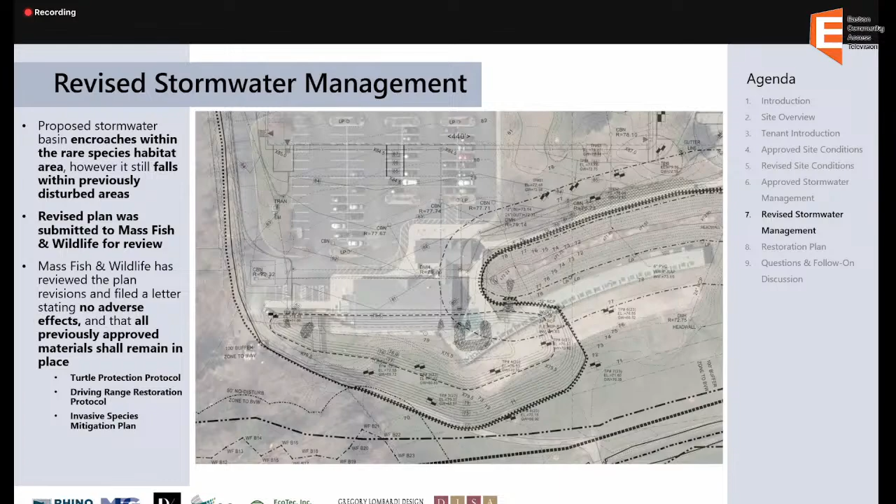We haven't changed the protocol for the number of plants and brush piles, so that will remain the same. So we're providing essentially the same habitat value. We're just condensing that slightly to make up for the area where there's the encroachment of the proposed stormwater basin.

So the fencing along both sides of the driving range will be removed. That constitutes a restriction of wildlife habitat, so that's still a bonus and a significant improvement that will be removed as part of this project.

We're doing the 2-year invasive species mitigation, so we'll provide treatments in late spring, early fall for any invasives that we find within that area. The project's entirely within the Hockomock Swamp ACEC, an estimated priority habitat for 5 listed species, as we noted before.

So again, in conclusion, we're providing more than 8 acres of restoration area as part of this project. A significant area that's currently maintained turf will be restored with native trees, shrubs, some brush piles to create habitat. So it's a significant improvement. At that, I think we'll be happy to answer any questions that the commission may have at this point.

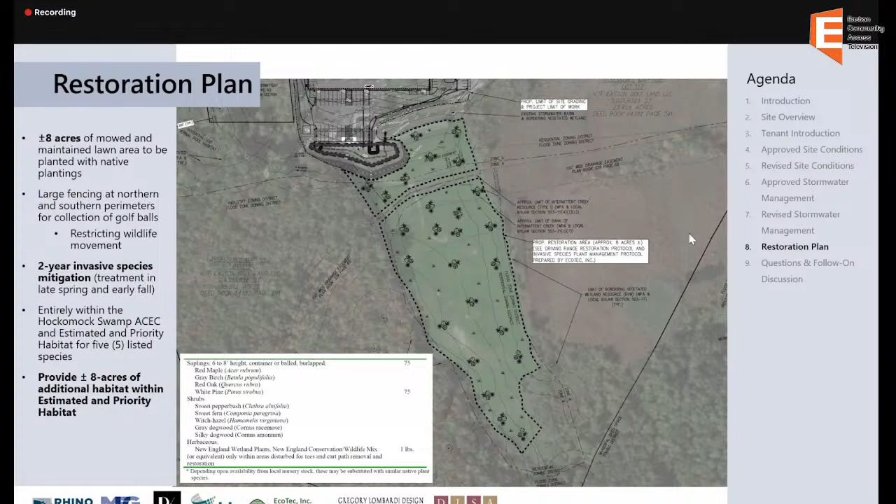Very good. Jennifer, comments on this? Yeah, I just have a couple, and then we'll ask John Chesia, our peer reviewer, to give us any comments if he has them at this time. But yeah, the first question was, can you give us an update on your construction schedule? So thank you for that one. John read the room there.

I think some of the work is now within the 50-foot buffer, and we talked about needing the waiver for that. Do you know if that was submitted? We discussed that as a team today, prior to this conversation, and we'll get that waiver submitted. Is that just revising the checklist? I wanted to make sure we understood exactly what was needed on that front.

You had a waiver the last time for the buffer zone, right? Or you didn't have one because you weren't within 50 feet? Austin, does that sound right? I think that was the confusion. So on the checklist, we weren't proposing any impervious within the 0 to 50.

I'll check back if we originally submitted a waiver. But it would just be essentially the waiver per the bylaw with the revised checklist noting the waiver for the work within the 0 to 50-foot buffer, correct? You keep referring to the checklist, I'm not sure what you're talking about there. It's just a waiver, it's a fillable form.

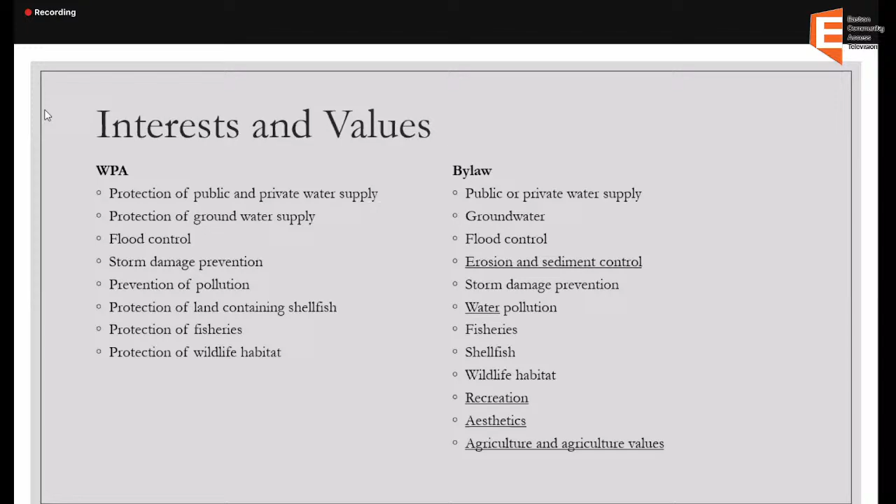For pollution, water is added in front, so it's water pollution. And we have added recreation, aesthetics, agriculture, and agricultural values. I do want to note that in our regulations, it had water quantity and quality in ponds, lakes, and reservoirs, wildlife, agriculture, and historic values, but they're not stated in our bylaw, so I don't think that can stay, if I'm not mistaken.

So the first resource area we're comparing is banks. Under the Wetlands Protection Act regulations, the upper boundary of the bank is the first observable break in slope or the mean annual flood level, whichever is lower. For performance standards, you can't cumulatively alter 10% or 50 feet, whichever is less. More may be allowed if there's no adverse effects on wildlife habitat, and culverts must be 1.2 times the bank's width. For our bylaw regulations, it's the first observable break in slope or mean annual flood level, but for that boundary it's whichever is higher.

So that's the difference there, and it's more stringent, which is good. Our performance standards are also more stringent, so no activity or work on the bank other than maintenance, and waivers are available for that.

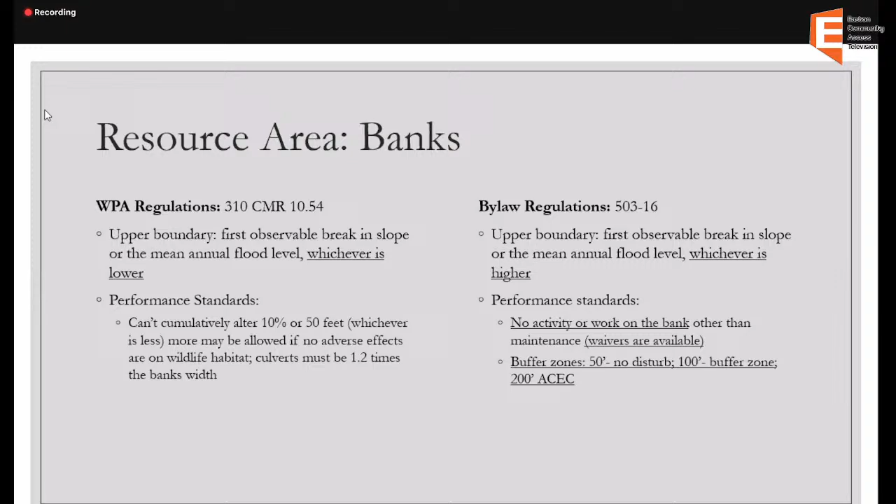For buffer zones, there's a 50-foot no disturb zone, 100-foot buffer zone, and if it's an ACEC, there's 200 feet of jurisdictional area. For vegetated wetlands or bordering vegetated wetlands, the Wetlands Protection Act only regulates bordering vegetated wetlands, so that's on creeks, rivers, streams, ponds, and lakes. Their definition says these are areas where soils are saturated and or inundated such that they support a predominance of wetland indicator plants. For the boundary, it's based on vegetational community, 50% or more of wetland plants.

For our bylaw regulations, it regulates both bordering and isolated vegetated wetlands. These are areas where the topography is low and flat, where soils are saturated annually. That's a bit of a difference in definition, and our boundary is different because we only go off of the vegetational community.

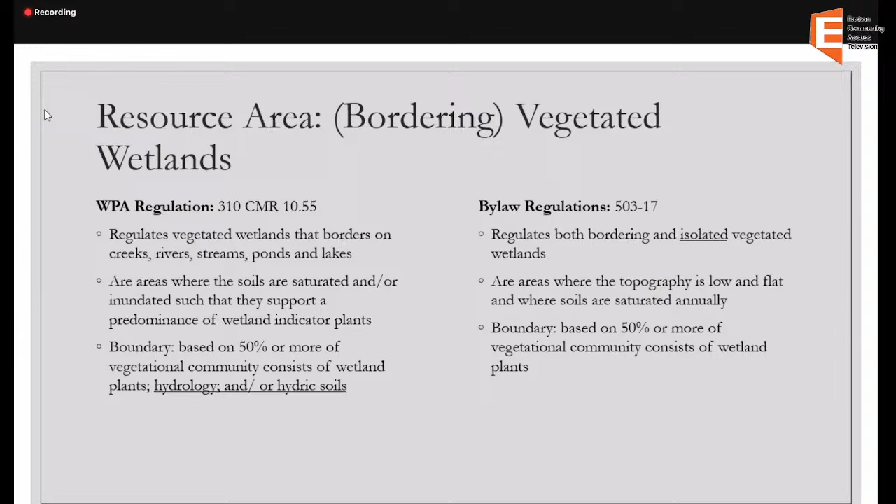For performance standards of vegetated wetlands, the Wetlands Protection Act says shall not destroy or impair, but an order of conditions may permit a loss up to 5,000 square feet when an area is being replaced with a similar function, and a loss of portion less than 500 square feet. Order of conditions may apply. For our regulations, it's no activity or work other than maintenance, and waivers are available. Again, with the buffer zones, we have a 50-foot no disturb, 100-foot buffer zone, and if it's an ACEC, it's 200 feet of jurisdictional area.

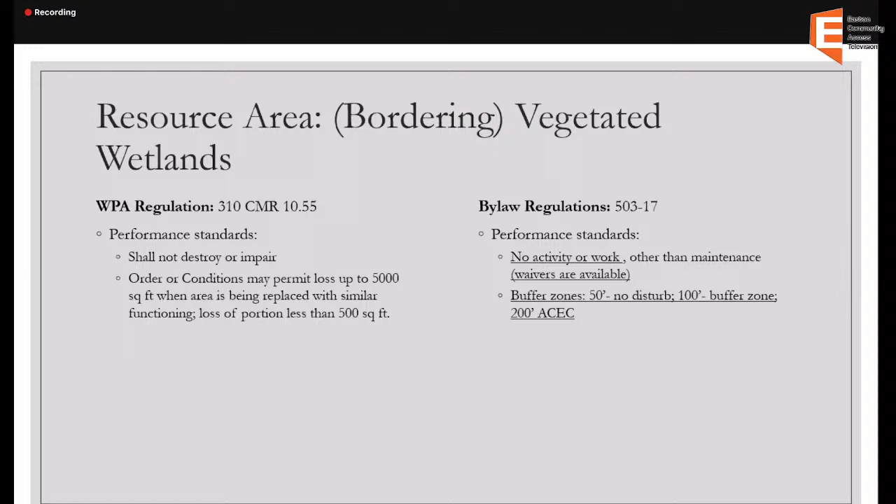This resource area is land under waterways and water bodies. Their boundaries and definitions are the same between the two regulations, so I just want to point that out. That's why it's not in there.

For performance standards, the Wetlands Protection Act regulations are: shall not remove, fill, dredge, or alter if land protects interests, cannot impair water capacity, water quality, or capacity of habitat for breeding, escape cover, and food. You can't alter more than 10% or 5,000 square feet, whichever is less, of an area. But you may permit more altering if there's no adverse effect on wildlife habitat, and culverts and structures must be at least 1.2 times the bank's width.

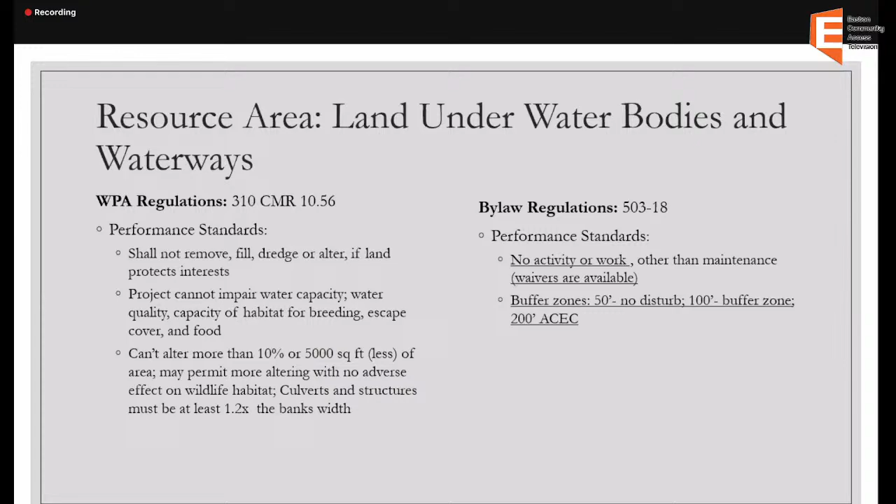For our regulations, there's no activity or work other than maintenance. Waivers are available, and I say that because you can't use a waiver for the Wetlands Protection Act regulations. Again, with the buffer zones, there's a 50-foot no disturb, 100-foot buffer zone, and if it's in an area of critical environmental concern, there's a 200-foot jurisdictional area.

This is land subject to flooding, and bordering land subject to flooding has the same definition. For isolated land subject to flooding, the Wetlands Protection Act regulations say it's an area that at least once a year confines standing water of a volume at least a quarter acre foot, to an average depth of at least 6 inches.

Performance standards for bordering land subject to flooding, under the Wetlands Protection Act regulations: compensatory storage of all flood storage lost needs to replace what was lost of flood storage for the 100-year flood elevation. Increased flows are not allowed, and it cannot impair land capacity for wildlife habitat functions.

For performance standards of isolated land subject to flooding, you shall not result in flood damage from filling. It can't result in adverse effects on public and private water supply, can't affect pollution prevention, and can't affect wildlife habitat. For isolated land subject to flooding, for our regulations, it's an area that at least once a year confines any volume of water. So as long as there's water in it of any volume, it's considered an isolated land subject to flooding.

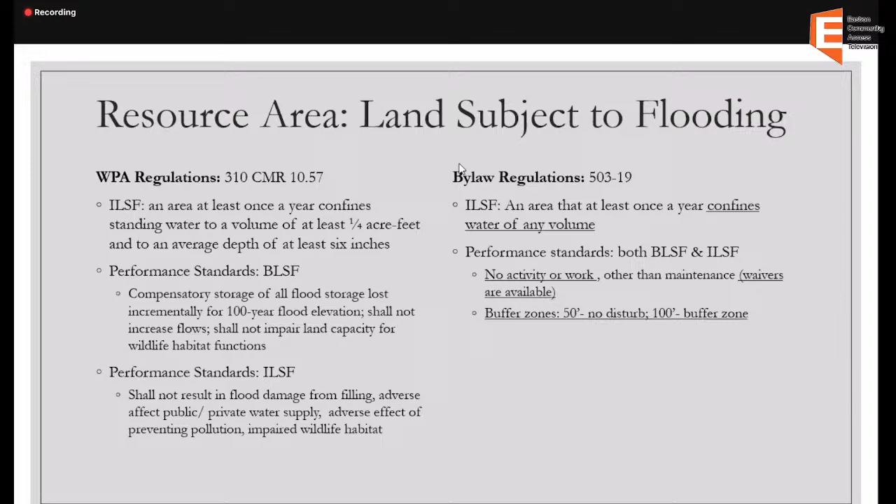Sorry, I don't know, it's not letting me change slides. I'm sorry, I've been there. Just give it a minute. That's what's next. Riverfront is next, yeah, that's the most fun one. Here, let's see if I can... there we go, okay, okay.

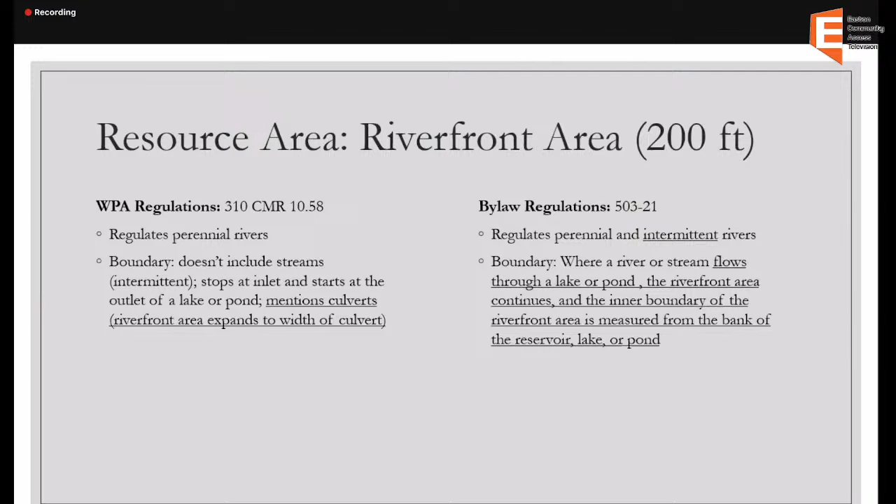And then for performance standards, the Wetlands Protection Act regulations, proposed work in order of conditions may apply to protect resource areas, and a practicable and sustainable equivalent economic analysis will be needed. So no significant adverse impact up to 5,000 square feet or 10%, whichever is greater.

For our regulations, for both, no activity or work other than maintenance. Waivers are available. That's within the 200-foot resource area. Proposed work within the riverfront follows other areas' performance standards and alternative

analysis for perennial streams. But basically, our riverfront follows like, so say if there's a buffer zone of a wetland or land underwater bodies, basically we have to follow those resource areas too. That's within the 100-foot, the 200 feet of riverfront area. And if it's in an ACEC, it's 300 feet of jurisdictional area because that's an additional 100 feet. But there's no buffer zones for the riverfront area.

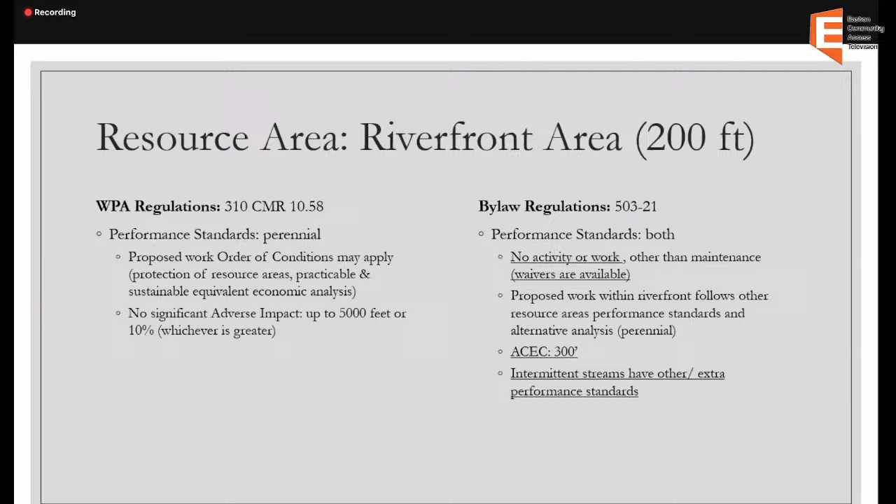Intermittent streams have other and extra performance standards, which I'm not going to get into today. That's a next week issue. But those are very confusing. So these are mentioned in bylaw regulations and not in the Wetlands Protection Act.

So vernal pools, it has a 100-foot no disturb, a 200-foot buffer zone, and 300 feet if it's in an ACEC. Reservoirs, lakes, and ponds, 50 feet of no disturbed, 100 feet for a buffer zone, or it could be 200 feet if it's considered a riverfront area, as we learned, if a river flows through it, it's considered a riverfront.

For rivers, streams, and creeks, it's just 200 no disturb, and that's also the buffer zone. It goes off of other performance standards, so it goes off of the riverfront's performance standards. So it's possible that it can have an area of critical environmental concern, but it's not mentioned in our bylaw. For buffer zones, land extending 100 feet outward horizontally, so the inner 50 feet is no disturb, the outer 50 feet is jurisdictional area.

So standards applicable to areas of critical environmental concerns. So that's just an additional 100 feet for vernal pools, banks, vegetated wetlands, riverfront, land under water, in an area of critical environmental concern.

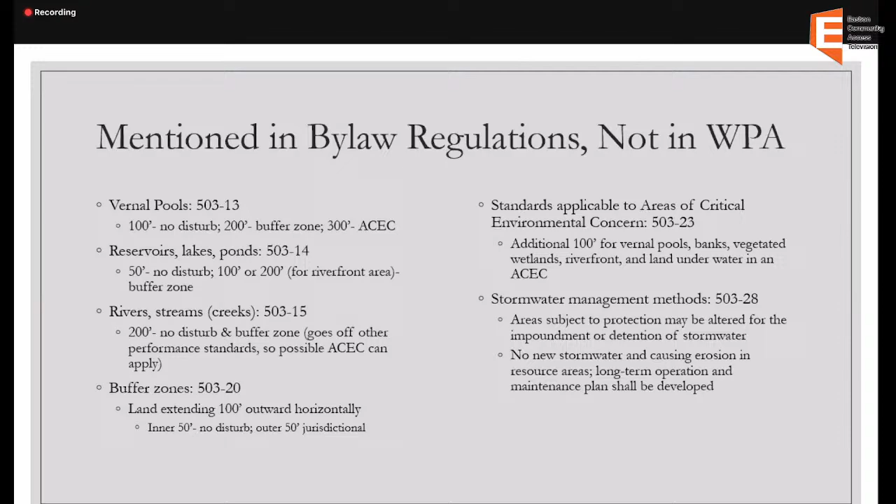And then for stormwater management methods, areas subject to protection may be altered for the impoundment or detention of stormwater, and no new stormwater causing erosion in resource area is allowed. A long-term operation and maintenance plan shall be developed too for stormwater. And that's all I have.

Is there any questions? Could we get a copy of those, please? Yeah, of course. I think they're very helpful. Thank you. Yep. Thank you for all your hard work putting those together. Oh, no problem. I will have, I'm sorry, I didn't mean to cut you off.

No, please go. I will have questions, as I think everyone does, on our riverfront bylaw next week, certainly. Yes, I started working on those slides today, actually. I think they're getting put together pretty well, but I was gonna ask any of you guys if there was any areas specifically you want me to focus on.

I think mine it might be a very difficult one to, I guess I'd love to know, like, the past 10 or so times that we've applied this bylaw, how we've done it, and what standards we've held applicants to. And I'd also love to compare it to how a couple other towns handle this, because I think we're balancing wanting to be a little bit more stringent than the Wetlands Protection Act, but also just want it to be readable, usable, and clear without everyone having to ask Jennifer questions about it.

Yes, I like asking Jennifer questions about it. That's why I'm here, so. Yeah, that's something I'll definitely look into for you guys. I'm not sure there's like a good way to search past projects involving that, but you know, might be a little more labor intensive than it ought to be.